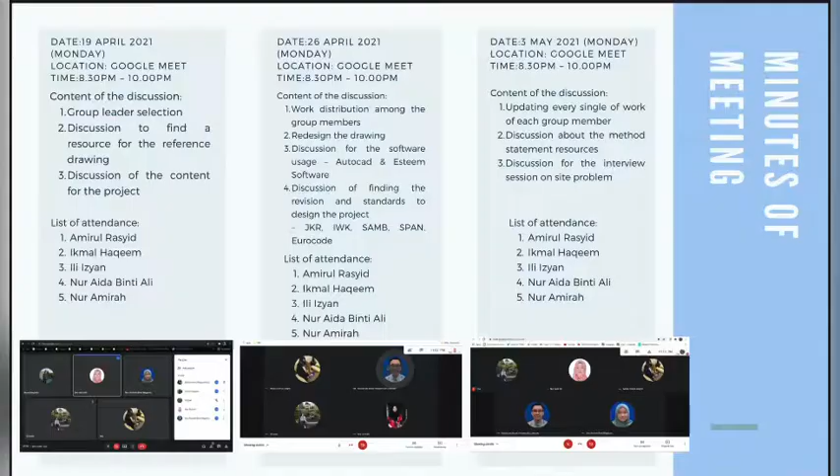Project background and information. The project development is a double-story house with a site area of 35,000 square meters.

The project name is proposed design, construction, and completion of medium cost double-story terrace houses and other design and build works, part of plot PT 336, Mukim Semabuk Central, Melaka, District Melaka.

The objectives of this project are, first, to ensure and develop technical knowledge on the design process in the field of construction works among the students.

Next, to identify the capability to implement sustainability in design and construction stages toward being environmentally friendly.

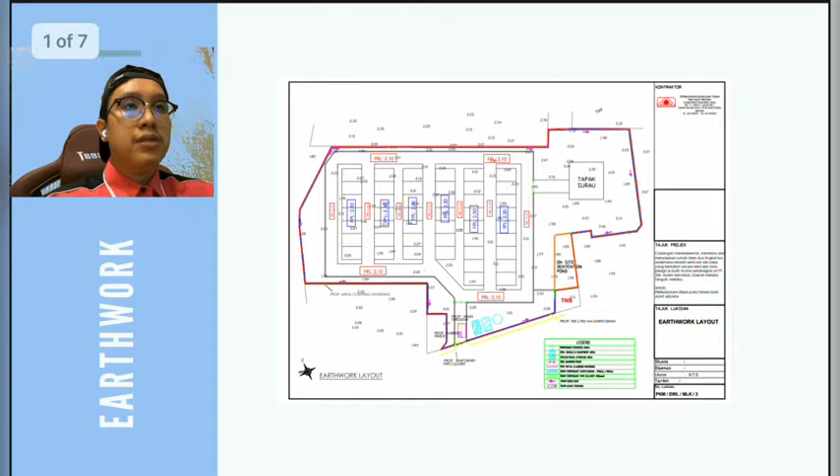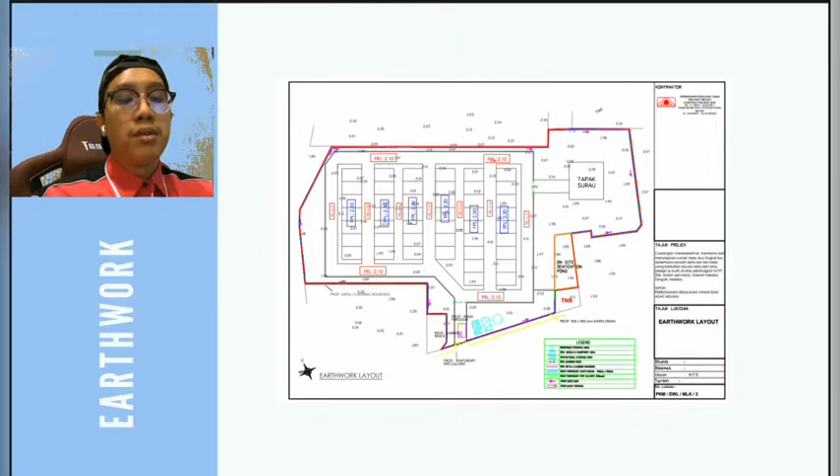In this earthwork layout, we propose the temporary level, platform level, road level, and we propose the temporary drain, washing bay and others. Next is the earthwork calculation.

The calculation is the cut and fill, to know the volume of cut and fill in this construction area.

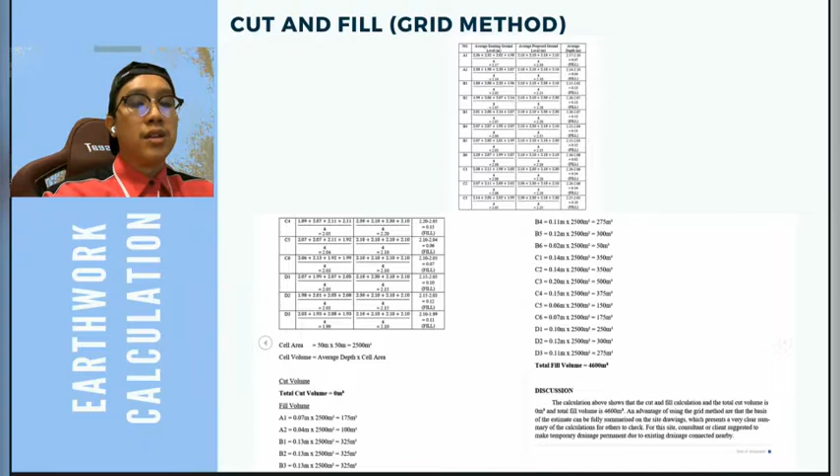The calculation is the invert level of the permanent drain. This shows all the drain invert levels that we calculated.

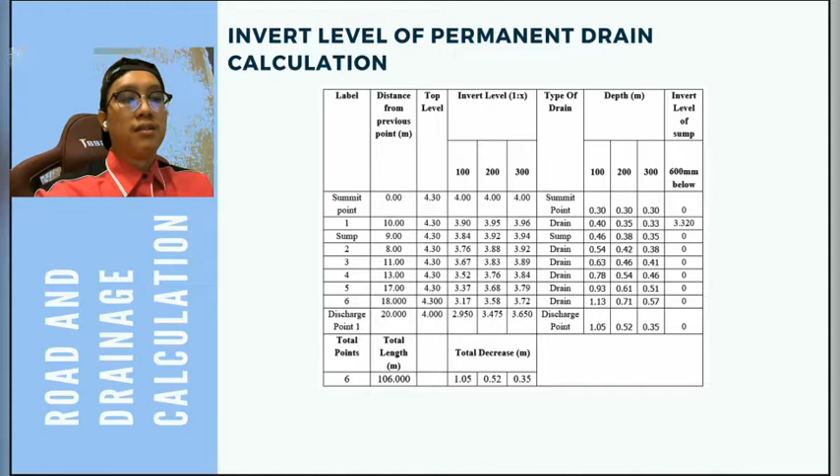Water reticulation. In the water reticulation plan, we propose the sluice valve, washout, fire hydrant, and bulk meter for this plan.

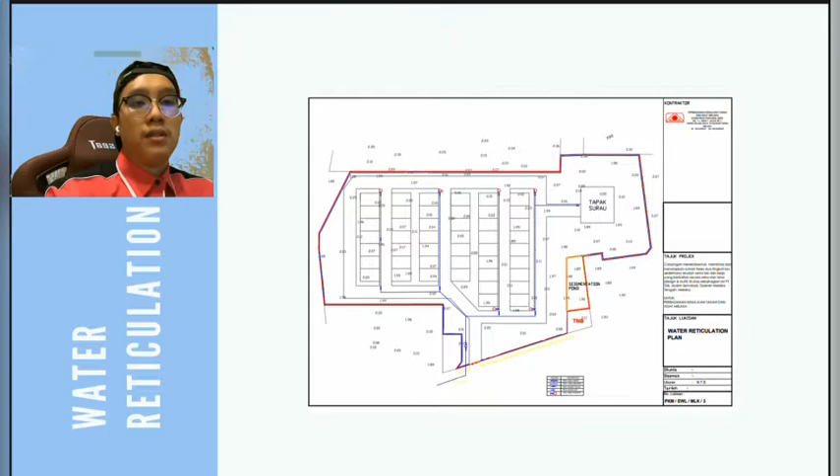Next is the sewerage. This is the sewerage plan where we propose the manhole and pipe layout for this project.

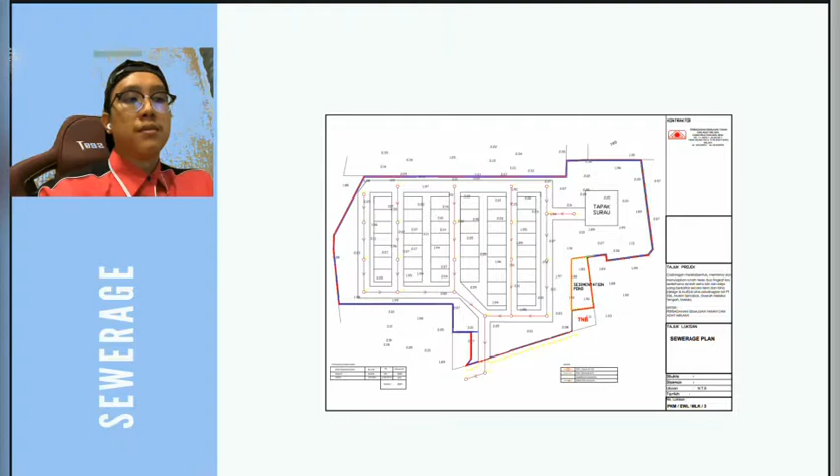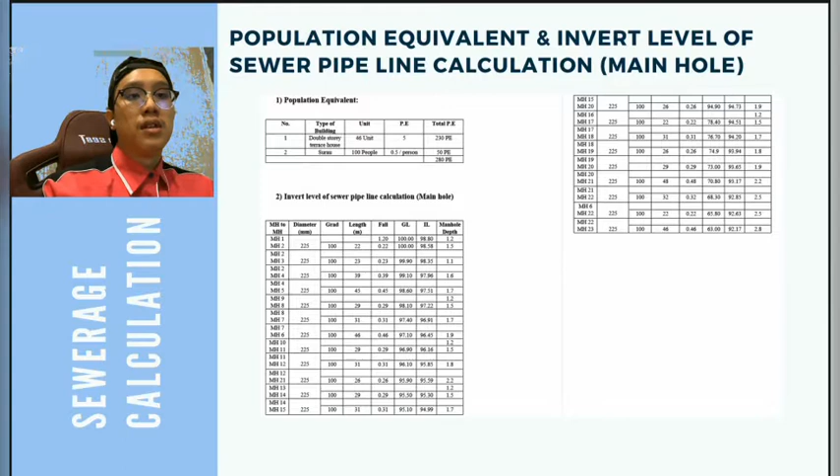Next is the sewerage calculation. This includes the population equivalent and invert level of the sewer pipeline calculation. That covers all the manholes that we calculated.

Thank you. Method statement. As for infrastructure work, there are a few method statements found to ensure the correct procedures of the activity work are followed.

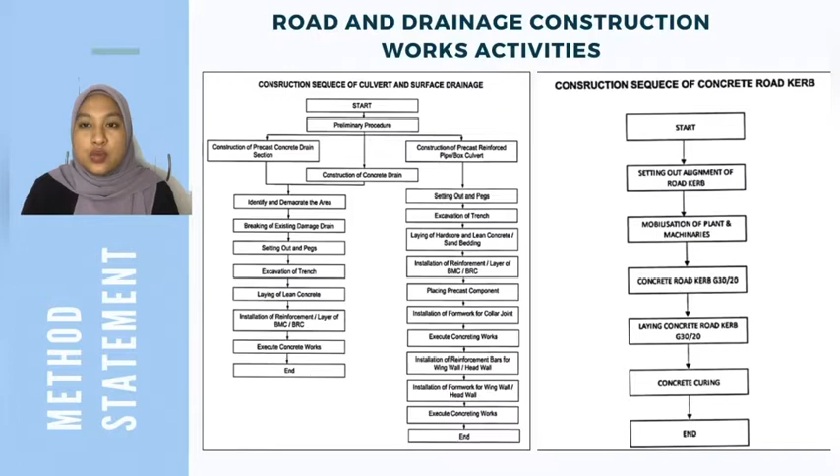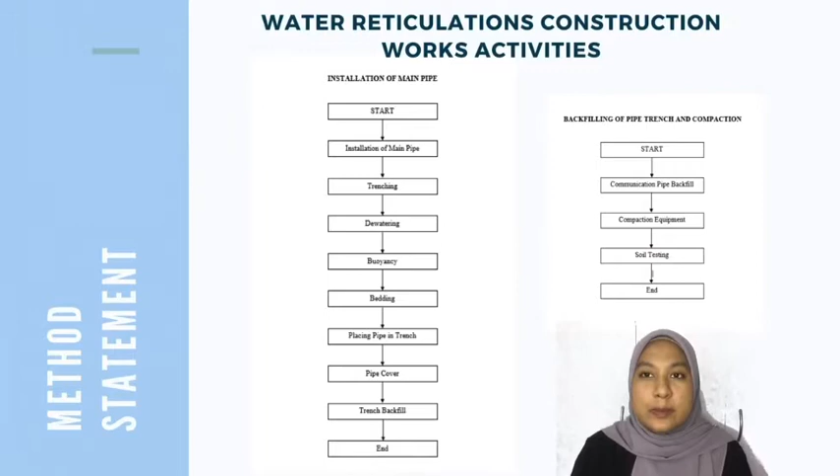Next, the first figure on the left shows the construction sequence of installing the main pipe, and the second figure on the right shows the construction sequence of backfilling the pipe trench and compaction. Both figures are part of the water reticulation construction works activities.

Conclusion. This project is able to develop technical knowledge on the design process in the field of construction work, either in infrastructure or structure building. It is also able to show the capability to implement sustainability on the design and construction stage.

Toward environmental friendliness, and to design and practice the actual building infrastructure by using software, were the outcomes of this project. This project also required organizing the project management to deliver the most cost-effective solution according to relevant standards.

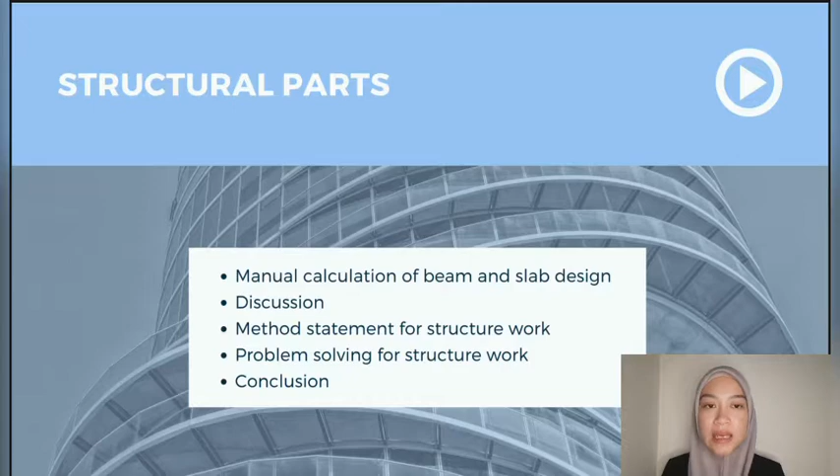For the structure part, there are 5 contents: the manual calculation for beam and slab design, the discussion for the assumptions made, the method statement for structure work, and the conclusion.

The design documentation for structure work involves the manual calculation of beam and slab. For beam, it consists of continuous and simply supported beam. For slab, it consists of one-way and two-way slab.

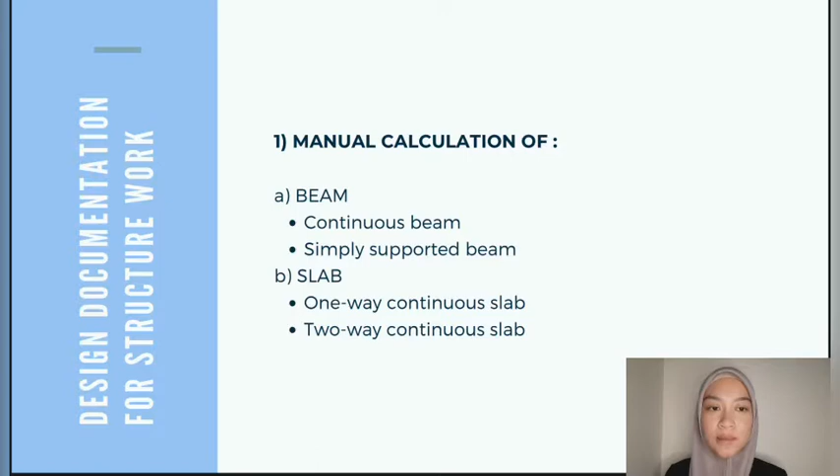For continuous beam, we have chosen beam 1B, from B to J. The figure shown is our selected continuous beam.

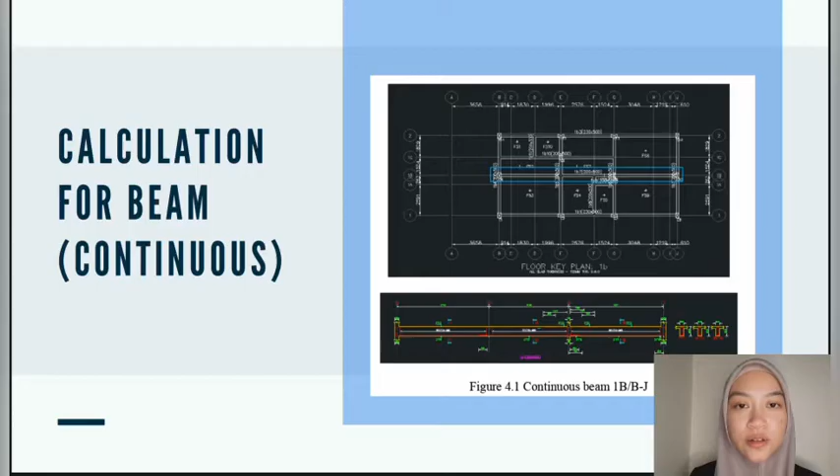For calculation, we started off with the characteristic of permanent and variable action. On beam 1B, B to J, the weight of concrete is 25 kN per cubic meter. The finishes, ceiling, and services is 2 kN per square meter.

The variable action for all slabs is 3 kN per square meter. The beam size is 230 mm by 500 mm, and the slab thickness is 125 mm.

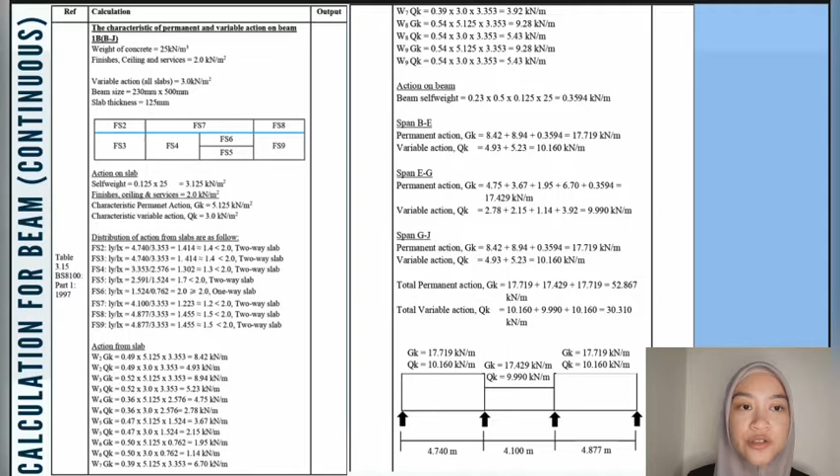Then we calculate the action on the slab, the distribution of action from the slab, and the action on the beam. The action of the beam includes 3 spans: BE, EG, and GJ. After obtaining the total permanent and total variable action, we established this diagram.

The calculation of the design starts with listing the specification, materials, and assumptions of the diameter of the main bar and link. Then we move on to the durability, fire, and requirement. After that, to loading and analysis, where we can obtain the design action, maximum shear force, and maximum bending moment.

Then we use the moment distribution method for elastic analysis of the beam. In this method, we can obtain the shear force and bending moment envelope of beam 1B of B to J. First, we obtain the loading, then stiffness and distribution factor of each span.

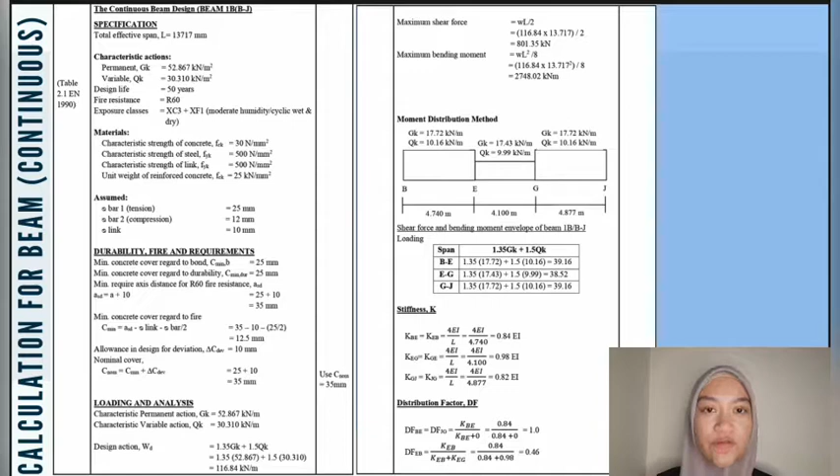Then we obtain the fixed end moment. After that, we do the moment distribution table, and from there we can find the support reaction for every span involved. Then we calculate the bending moment diagram using the formula 1/2 times height times length.

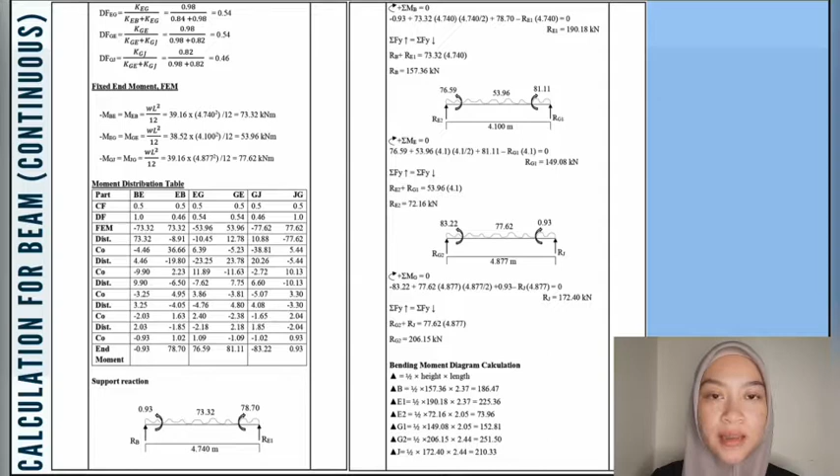Based on the area tension of steel result, the suitable size of bar assumed is 10H40, which is 12,568 mm². Then we proceed to the checking for cracking and spacing.

If the spacing of outer bars is less than the maximum spacing, then the assumed size and numbers of bar are acceptable. Then we proceed to the deflection. If the maximum span is bigger than the actual span, then the design is okay.

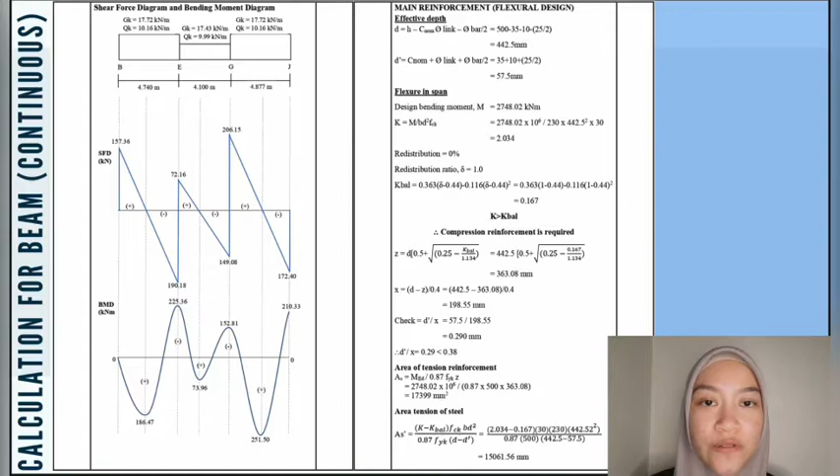Next is the flexural support. If the K is less than K bar, then compression reinforcement is not required. Then we can obtain the shear force diagram and the bending moment diagram.

After that, we move into the main reinforcement of flexural design. First, we find the effective depth, then the flexure in span. If the K is greater than K bar, it means the compression reinforcement is required.

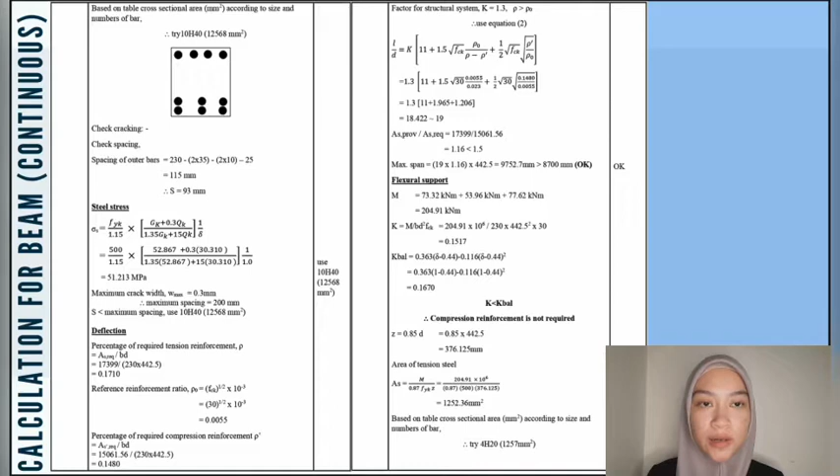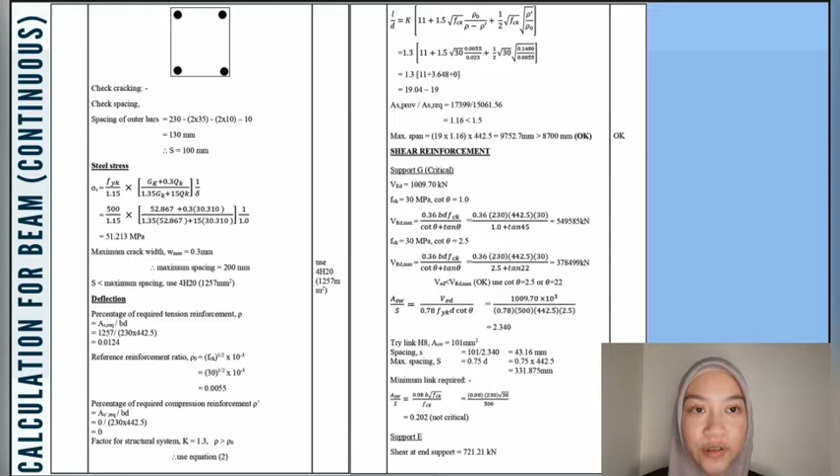Then we calculate the area of tension reinforcement and the area tension of steel. Here, the assumed 4H20, which is 1,257 mm², are acceptable as the spacing of outer bars is less than maximum spacing.

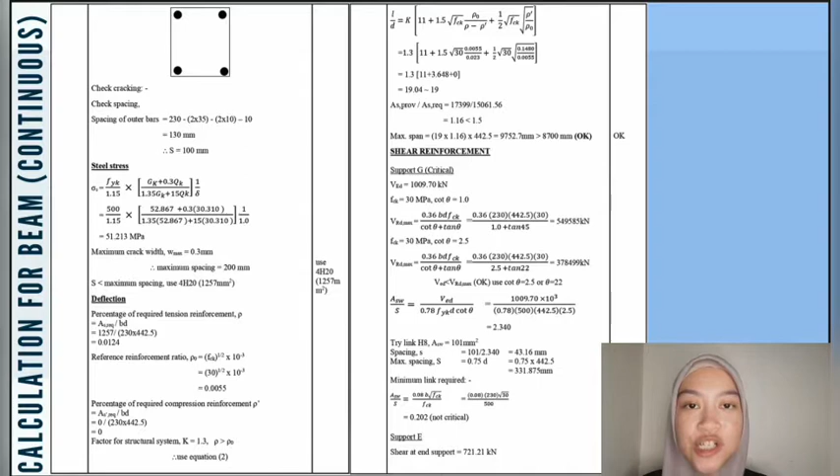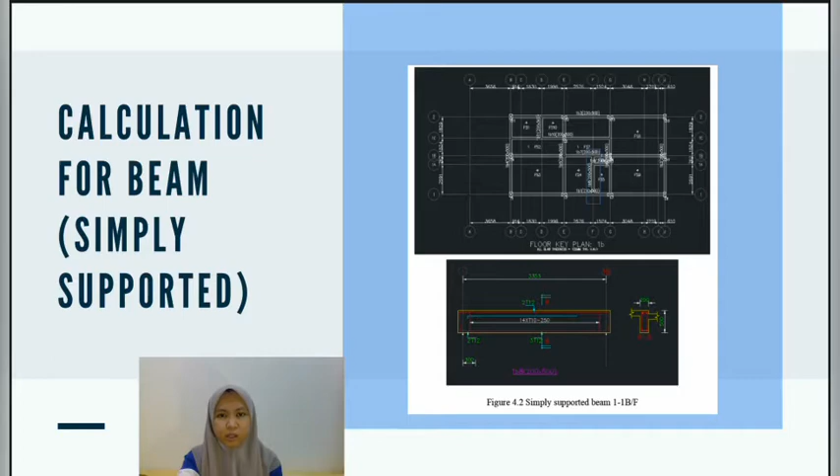For simply supported beam, we have chosen beam 1-1BF. The figure shows our selected simply supported beam. For calculation of the simply supported beam, the permanent value is 2.75 kN/m².

The variable value is 3.0 kN/m². Unit weight of concrete is 25 kN/m³. The beam size is 100 times 250 mm.

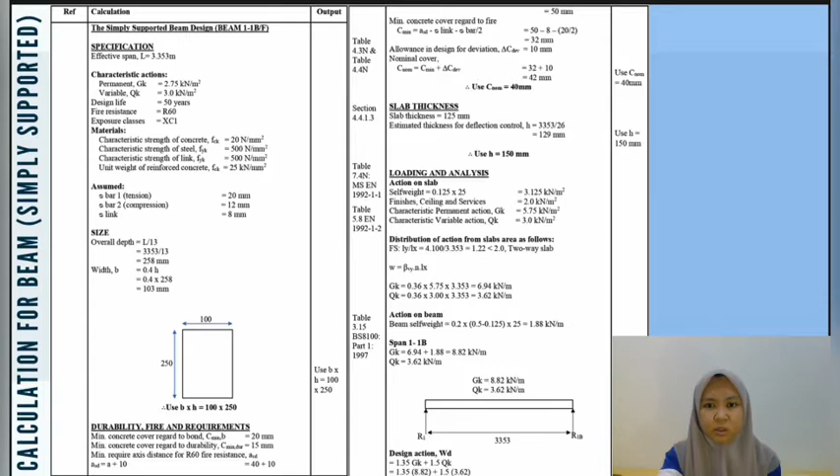Then we calculate the action on beam. Here we get the maximum shear force and maximum bending moment.

For the main reinforcement, we calculate the design bending moment, and since K is bigger than K bar, the compression reinforcement is required. Then we calculate the area of tension reinforcement, area of compression steel, and area of tension steel.

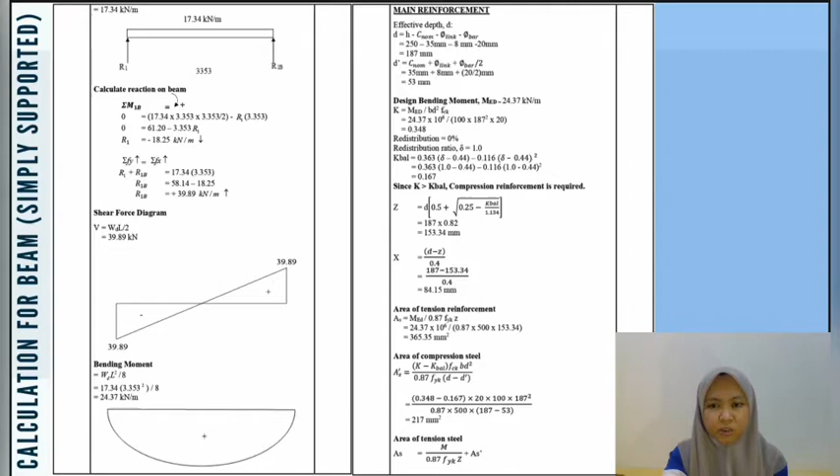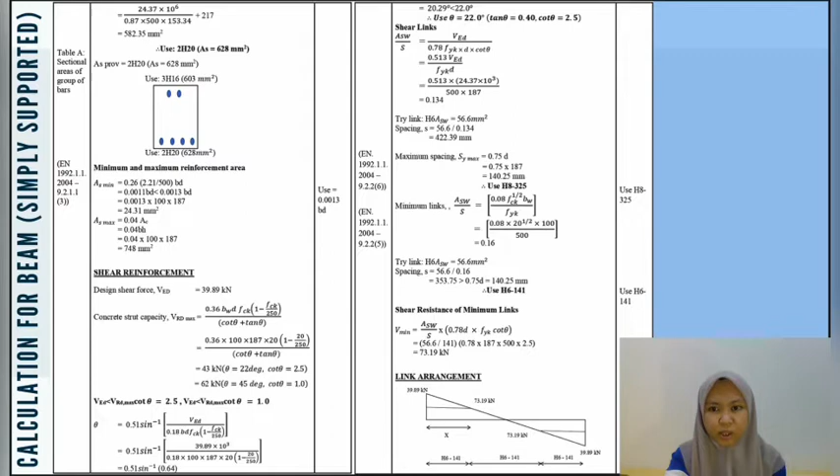Based on the area tension of steel result, the suitable size of bar assumed is 2H20, which is 628 mm². Then we calculate the shear reinforcement, shear link, and shear resistance of minimum link, so we get the link arrangement as shown on the diagram.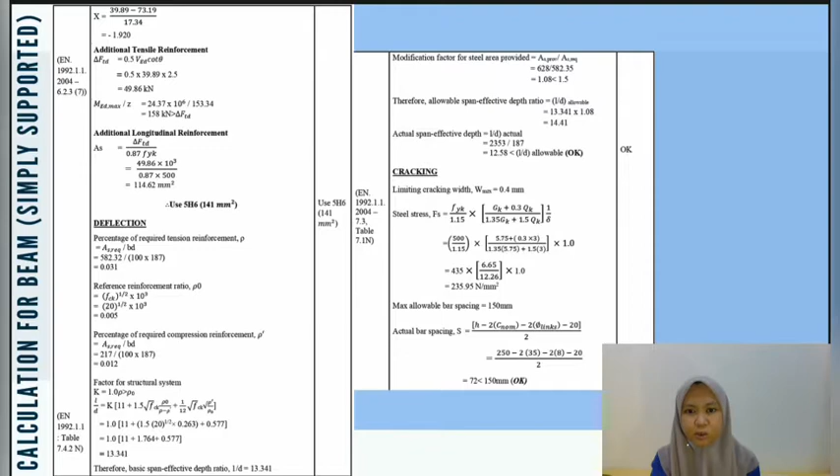Calculation for slab. This is the example of two-way slab calculation. For two-way slab, we use first floor slab 3, and for one-way slab, first floor slab 2. For both calculations, one-way slab and two-way slab, we use European standard, which is Eurocode 2.

The assumption for diameter bar is 8 mm, and the assumption for design life is 50 years. The fire resistance is R120, which is according to table 5.8 in Eurocode.

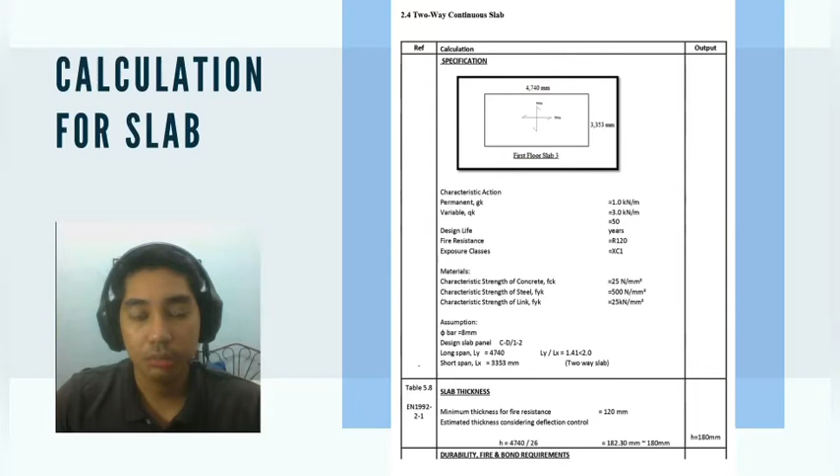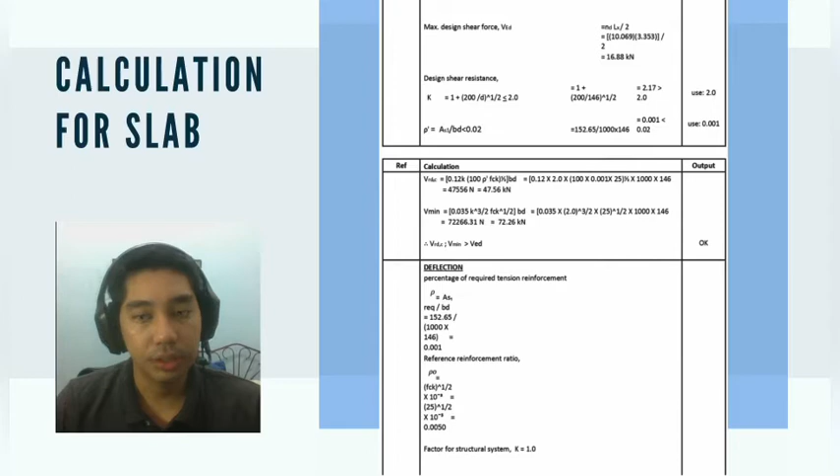The thickness in the calculation for two-way slab is 180 mm. The thickness of the slab can be determined by fire resistance requirement and deflection control, which is the most common thickness limitation. All the assumptions were made due to economic factor and good design of structure.

On June 17th, our group interviewed Encik Mio Nazif bin Mio Zahari, who is the site engineer from MTC Imperial Sdn Bhd, with his colleague Muhammad Yazid bin Jamil, who is the draftsman.

We decided to interview them since their experience in engineering fields has grown, and we believe that they will have a unique viewpoint on issues resolution on the construction site. The interview session was organized using Google Meet and was performed over 1 hour.

Problem and solving. The first one is slope collapse problem. When heavy rain falls, this cutting and filling process might cause soil to flow into surrounding waterways.

So to overcome this problem, slope stabilization work must be done in accordance with the regulation, and protection on the slope must be made to prevent surface erosion and water infiltration into the soil. Additionally, constant monitoring of the slope construction is required so that any hazard change will be discovered quickly.

The contractor should undertake HIRARC to identify possible risks that may occur in the region surrounding the slope cutting as a control strategy. Second is polluted roads.

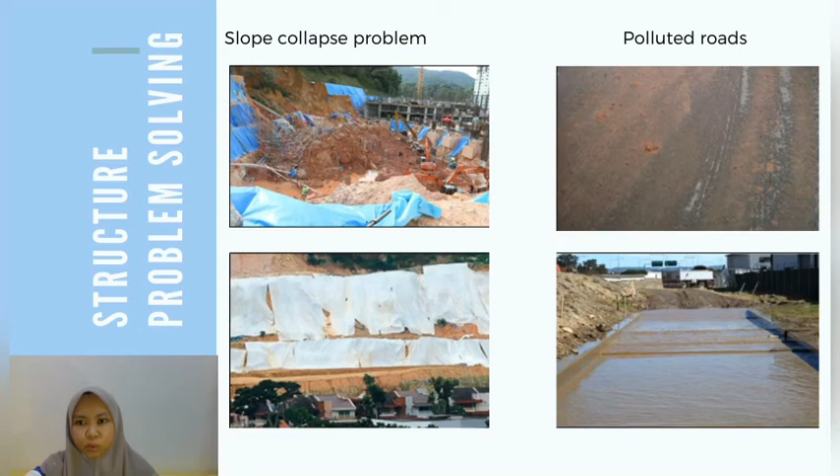To overcome this problem, the construction site must provide a wash bay to keep it functioning optimally and efficiently, to also prevent the public road from any pollution.

You have to do some kind of sloping in order to make the overburden or the soil stable.